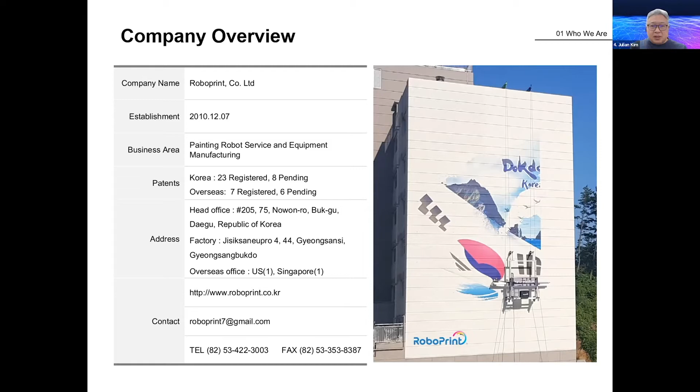Okay, first, who we are. Roboprint was founded in 2010, so it's not a new company, it's not a startup. It started out as an inspiration of Mr. Park, who is the founder and CEO of Roboprint, Mr. Jung-Gyu Park. He came up with the idea after contemplating many construction workers who were exposed to a lot of dangers because they were hanging from ropes on very high surfaces. It was quite dangerous, and he came up with the idea that

2018 is when RP decided that it was going to establish foreign offices. Recently in 2020, we have had a world first painting of a very large chimney on a thermal plant, which was over 100 meters tall.

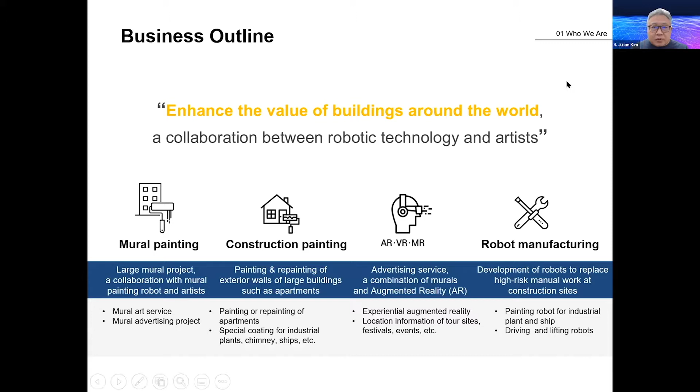Okay, now the technology and the products. The core technologies of RP are atypical surface recognition and Z-axis control to be able to move the nozzles in and out and up and down, and recognize surfaces that are irregular so that the robot can adjust to the surface and do efficient painting work. It also has developed and perfected a wireless remote monitoring and control technology so that the robot can operate somewhat remotely from the monitoring operator of the project.

RP has also developed a sophisticated 4-color or CMYK injection control to carry out intricate mural artwork. One of the impressive things clients tell us is that our ArtBot can paint not only simple pictures but also handle complex artwork with perfection. If somebody wanted to paint a 50-story building with impressions of a Da Vinci, Monet, Renoir, Klimt, or any other artwork, our robot would be able to do it perfectly and accurately, faithfully replicating the colors.

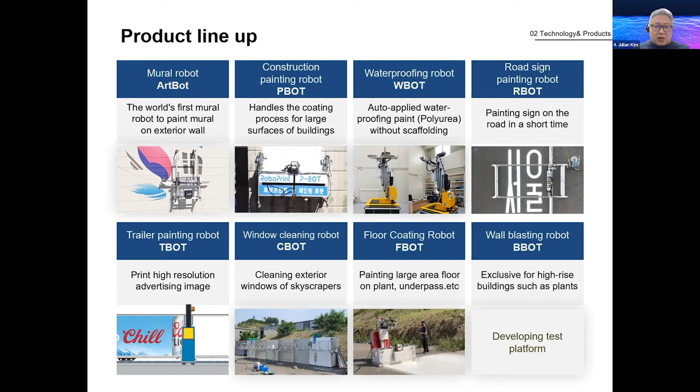However, what we need to design to accompany this is a robot that can do the blasting and testing of these structures before the paint is actually put on. So that's something else that we're working on.

This is something that the ArtBot can do efficiently and without any trouble, whereas by human hands it would be impossibly difficult.

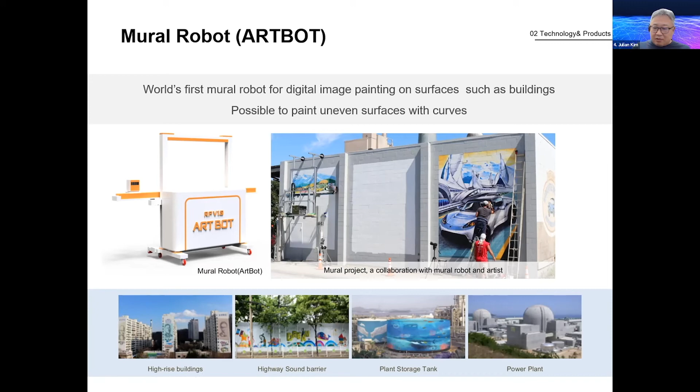Okay, let's talk a little bit about the PBOT. Here you see what the PBOT kind of looks like at its current design. It would go up and down, and then you'd have to move it, and then it would go up and down again.

We are also currently designing a PBOT to more efficiently handle wall spaces that have a lot of windows. Currently, the PBOT is not very efficient with walls that have a lot of windows, so it basically paints in between, and anything near the windows has to be done by hand. However, we've been working on a prototype so the robot can do most of the painting around the windows, requiring human hands only for touch-ups on each window. We're hoping to commercialize that sometime next year.

It is also a request that's been conveyed to us by the Singapore BCA and HDB, who have asked us to design a robot that is good around windows.

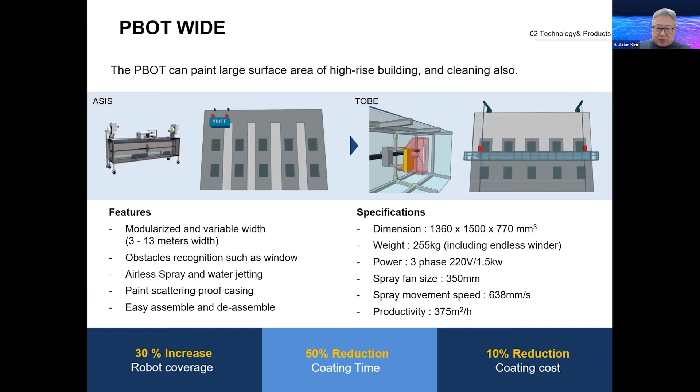This is the PBOT. Again, this shows the wide PBOT, or window cleaning robot.

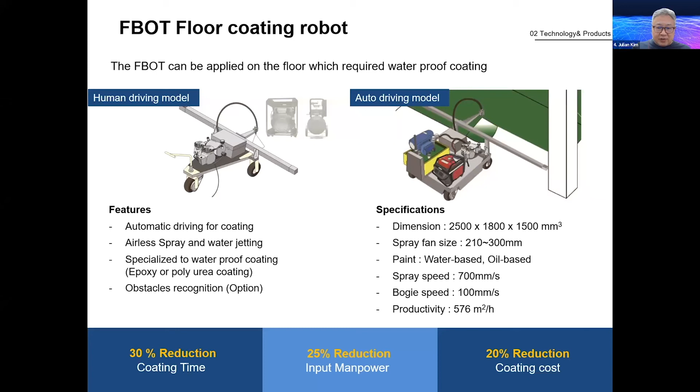This is the FBot, the floor robot. It can efficiently paint floors. This is a photo of the FBot.

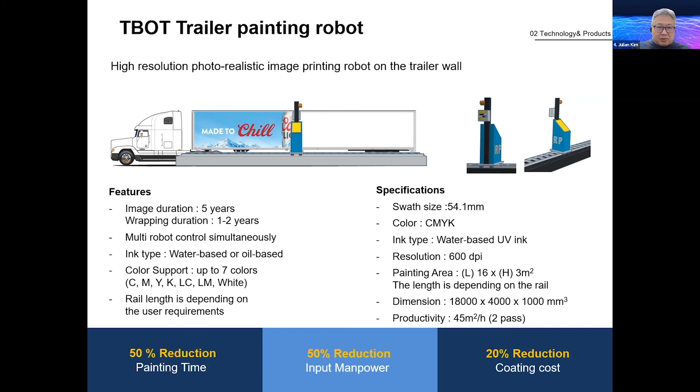This is a representation of the trailer robot that I discussed before. I believe the organizers will be able to send you this presentation so you can look at it at a more leisurely pace. This shows some of the tests we're doing for the trailer robot.

You can see that the graphics are actually quite descriptive, quite accurate, and quite colorful as well. So we think the robot is doing a very faithful representation of what you'd otherwise get with a sticker decal on these advertisements.

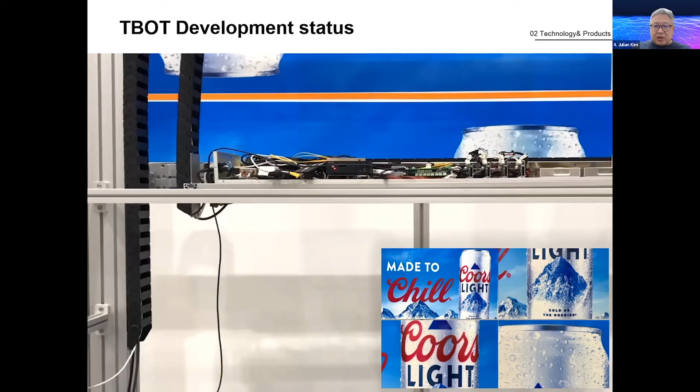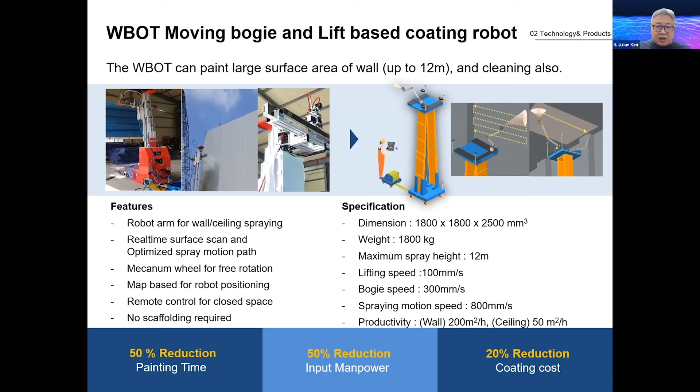This is a robot that comes with an extending structure, so it can move up and down, and go up to 12 meters high. Conceivably, if the demand is there, we could make this even go higher, without the need of cables or lifting structures.

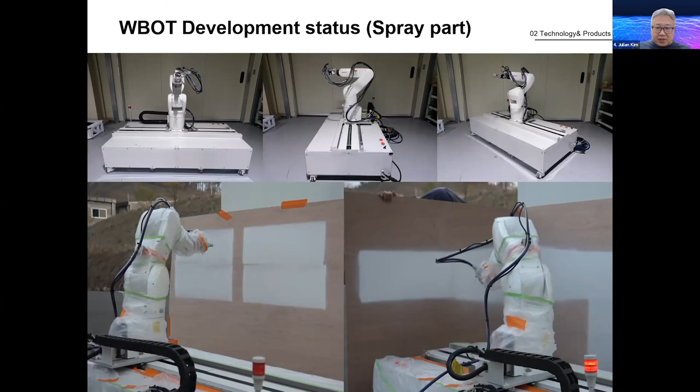This is again the robot you can see, and this is a robot that is much more accurate in painting specific things on the wall.

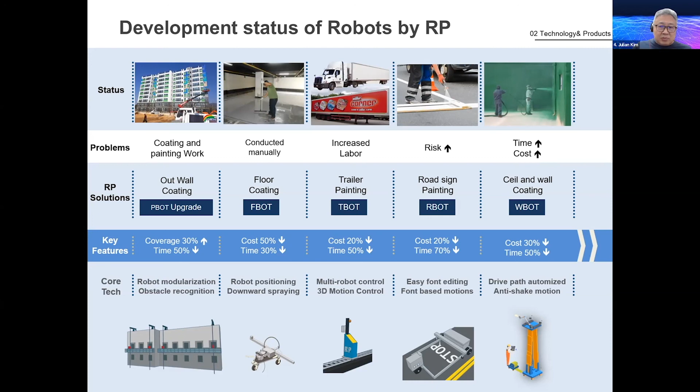These are some of the challenges we faced, or challenges in the market, and how our robot is trying to address them. You can look at these at your own leisurely pace after this presentation.

Our global business includes a US subsidiary and a Singapore subsidiary. The US one is called Roboprint LEO-D, and the Singapore one is Roboprint Asia. LEO-D has been created to cover most of North and South America, and Roboprint Asia covers Europe and Asia and potentially other markets.

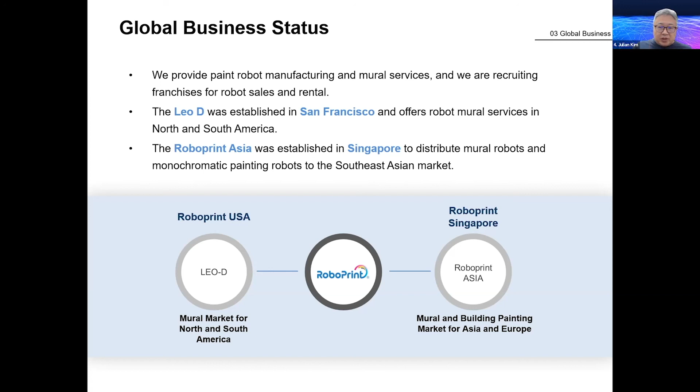I think the important thing is that apart from Roboprint doing its own business, we are very open to discussing licensing or joint venture projects in other countries. Roboprint doesn't intend to go into every market and set up subsidiaries, so we'd prefer to find good strategic partners in all parts of the world, so we can either license, do a JV, or a combination of both.